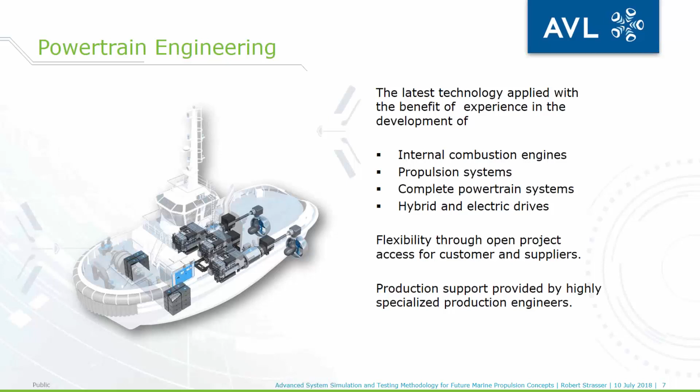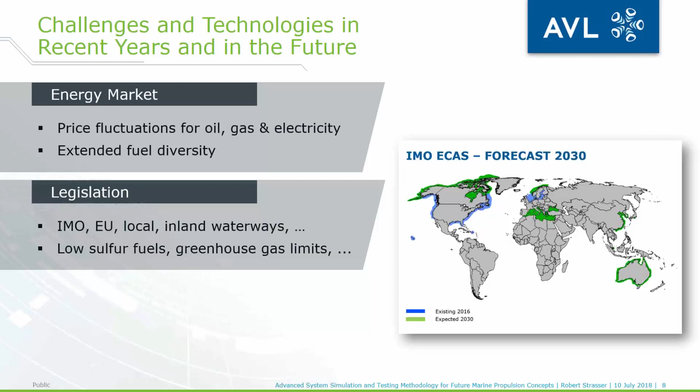We all had to face challenges in the last few years, and we will have to master even greater challenges in the future. The energy market is a challenge as the prices for oil, gas and electricity are changing, and they influence our work significantly. Catchwords are dual fuel engines, conversion to gas operation and hybridization. The legislation forms our boundary conditions for developing new products. Emission control areas will be extended. There are very strict local legislations, and low sulfur fuels and limitation of greenhouse gases are major topics. The environmental awareness of our customers and our environmental responsibility are also important drivers for introducing new technologies. There is high attention of public and politics.

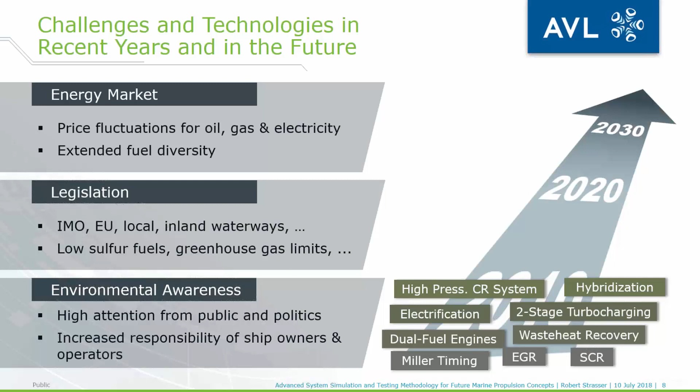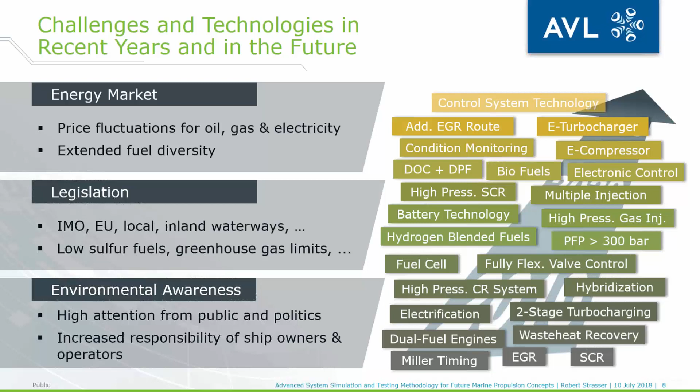In the last years, we successfully introduced technologies such as Miller timing, EGR, SCR, two-stage turbocharging to the market. Dual fuel engines and hybridization are almost state-of-the-art technologies today, even for the marine industry. AVL is now working on many new technologies: fuel cell technology, battery technology, electronic control, electrically driven turbochargers, new ignition technologies such as microwave or laser ignition, new after-treatment concepts, and many more.

Ambitious goals must be achieved by 2030. The carbon dioxide emissions have to be reduced by 40%. The NOx emissions should be 80% lower. Here we need completely new approaches. It is not enough just to optimize engine performance or optimize single subsystems. New concepts are required, comprising the entire propulsion and energy system of a vessel.

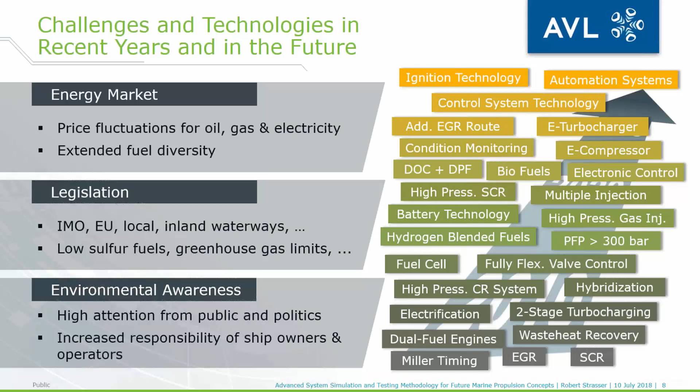AVL customers are no longer only engine OEMs and engine suppliers. In case of marine applications, we have shipyards, shipbuilders, ship owners and operators, propulsion system suppliers, control suppliers, but also classification societies as customers and partners. The partners developing a new product or operating an existing system have various challenges and tasks listed in this figure. Shipyards are responsible for system integration, and they want to improve the total cost of ownership for their customers.

Engine and component suppliers want to introduce highly efficient, reliable products, enabling lowest emissions and best energy efficiency design index. Ship owners want to do route optimization, maintenance planning, or they want to renew their fleets. Last but not least, classification societies are interested in concept proofs, virtual homologation, model-based validation of systems, or fail-safe investigations. Most of these different tasks can be supported by system simulation, virtual system integration, or model-based development approaches.

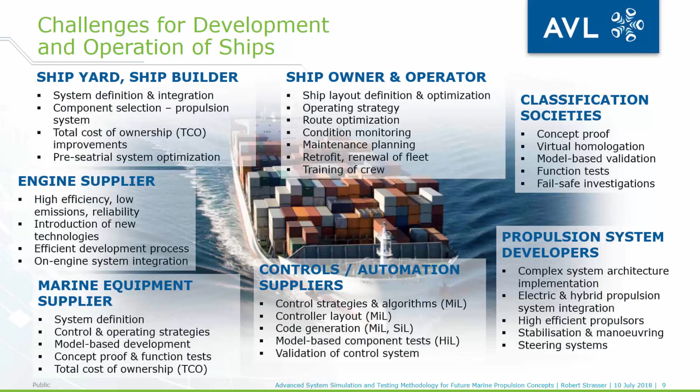We need technologies which ensure the compliance with future environmental legislation. There is the combustion engine technology, for example, two-stage turbocharging, the increase of the peak cylinder pressure higher than 300 bar, variable compression ratio, variable valve timing, LNG, gas engines, exhaust gas after-treatment technologies, or friction reduction.

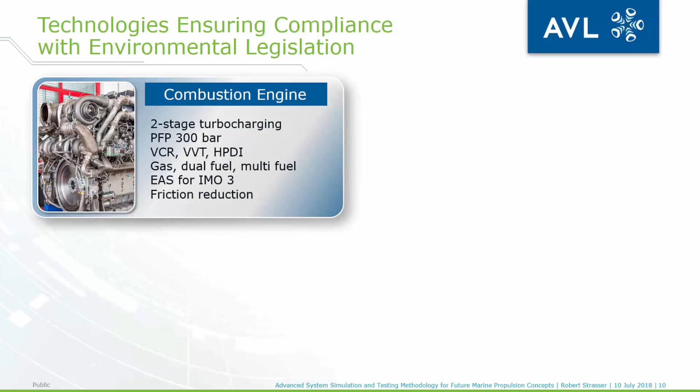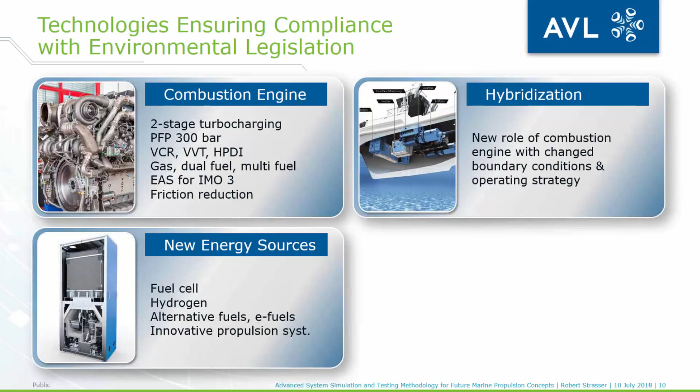Hybridization is interesting in many areas of marine application. Here the combustion engine has a new role with changed boundary conditions and operating strategies. New energy sources, fuel cells, hydrogen and alternative fuels, energy storage systems and innovative propulsion systems can also contribute to an efficient and clean operation.

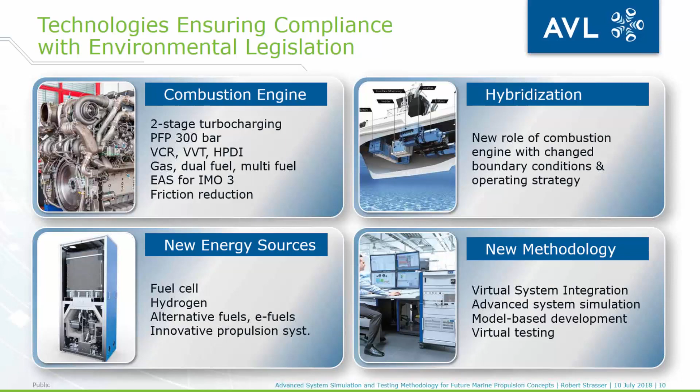And there are new methodologies such as virtual system integration, advanced system simulation, model-based development and virtual testing. They support the development and help to optimize the overall propulsion and energy systems of ships. Virtual reality plays an increasingly important role in the development process. There are catchwords such as virtual system integration, system simulation, and model-based development.

Today I would like to show you that these terms are not abstract terms and that system simulation and model-based development approaches are helpful tools for developing new marine propulsion system technologies, and how simulation and model-based development activities can support testing. So I will give you a brief introduction to system simulation and its tasks. Then I will show use cases, and subsequently I would like to explain model-based development and virtual testing.

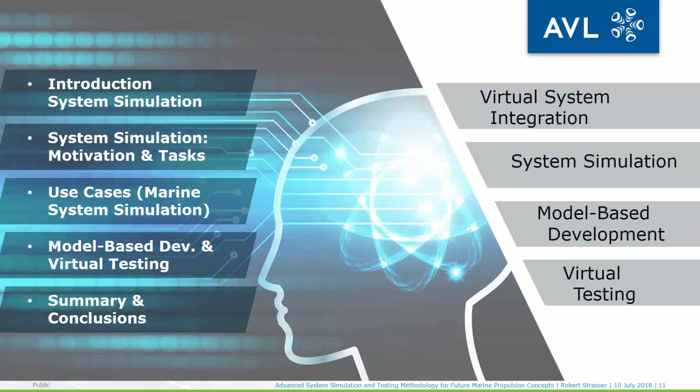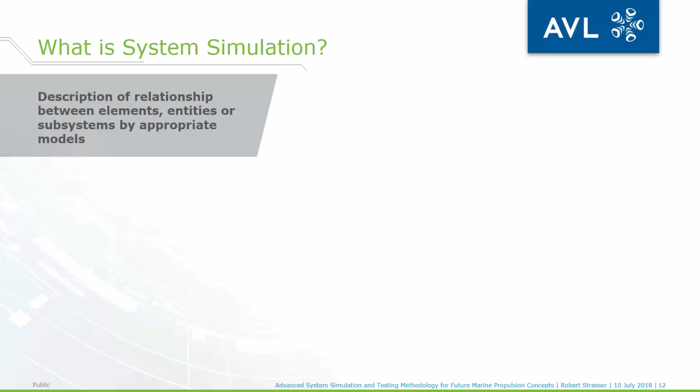First of all, I would like to explain system simulation. According to my definition, it is the description of the relationship between elements or components by appropriate models. I would like to explain it by means of a small example from biology. If we have a predator-prey relationship, for example with foxes and rabbits, this relationship can be described by the so-called Lotka-Volterra equations. Two ordinary differential equations are coupled.

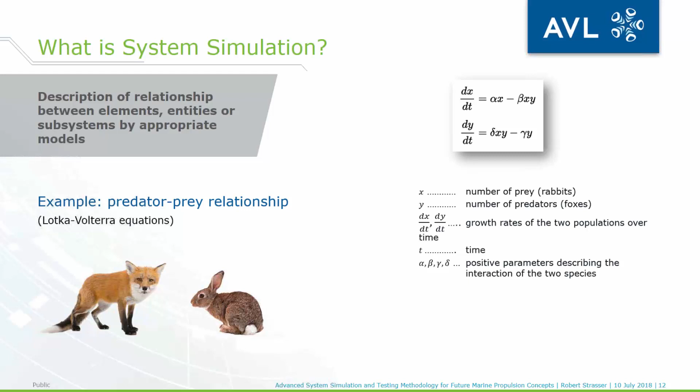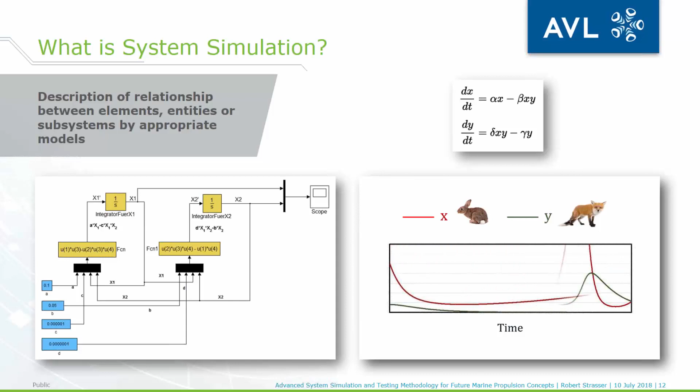The numbers of foxes and rabbits are variables, and the growth rates of each population and some parameters are describing the interactions of the species. We can set up a simulation model describing the situation and simulate it. And based on the chosen parameters, we can achieve thousands of different results for the development of the fox and rabbit population. Only a few cases are shown in this figure. But there's a huge variety of different results depending on the boundary conditions and the parameters.

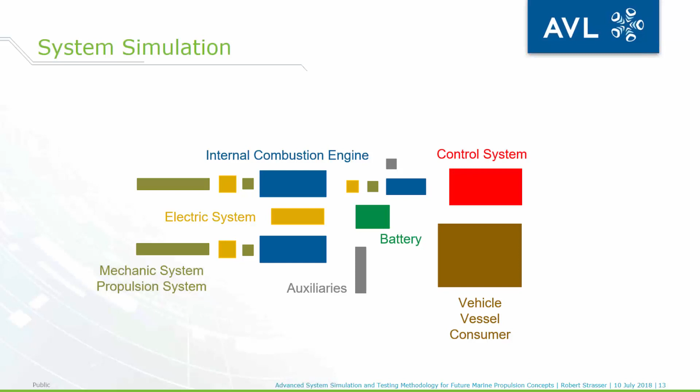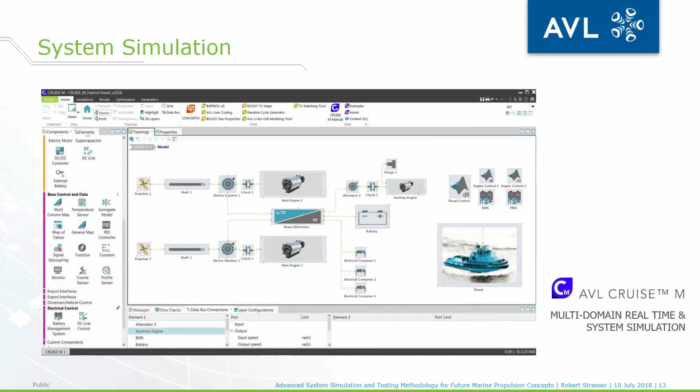Whereas in the example with the foxes and the rabbits there are only two subsystems, for the system simulation of a marine hybrid application, many single models, subsystems and components of different domains with different characteristics can be used for the purpose of an overall system simulation. With an appropriate tool, it is possible to describe components and to describe the interactions between components and subsystems. The multi-domain system simulation allows the optimization of the energy management and investigations on the interactions between various subsystems.

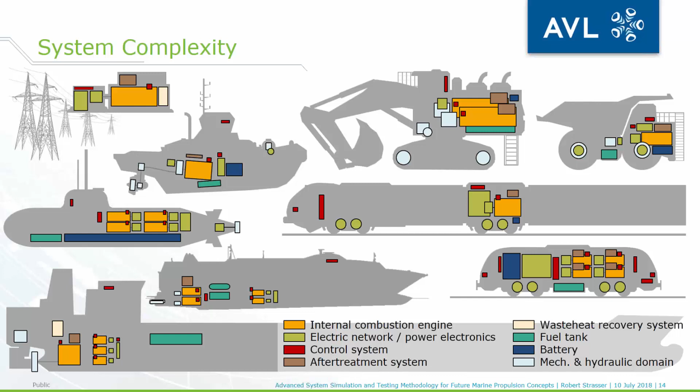Large engine applications are generally characterized by high system complexity, as there are multiple propulsion and energy systems comprising different domains. Especially in view of increasing demand regarding new technologies and hybridization, system simulation and model-based development approaches help to understand and to optimize overall systems. There are numerous tasks of system simulation in the development process with the aim of supporting concept decisions and the specification of components, but it is not enough just to find the best and optimum components. It is necessary to develop the optimum operating and control strategy.

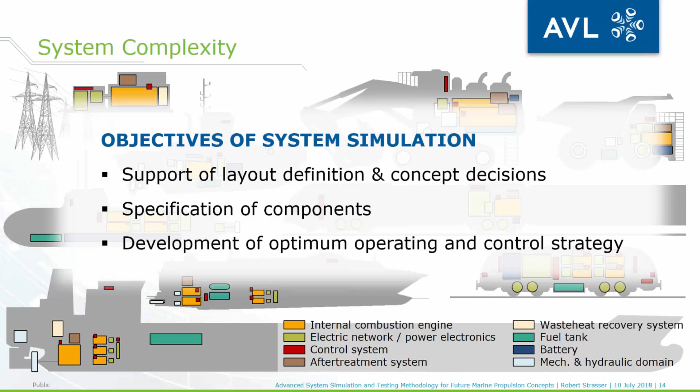The main objective of system simulation is the improvement of the operational excellence. It should support new ship design, optimize performance and the operating strategy. It should help to prevent errors and detect failures in a very early stage. Damages should be avoided and the reliability and availability have to be improved.

System simulation and virtual testing is useful when tests are too expensive to be performed, when there is limited component availability, and when the effort for testing and the number of variants are high. System simulation and virtual testing is also useful when the risk of tests is high. With virtual approaches, there is no danger of exceeding limits and damaging very expensive and individual components. System simulation is a valuable methodology when tests cannot be performed in reality, for example, if extreme boundary conditions are given or when worst-case scenarios should be investigated.

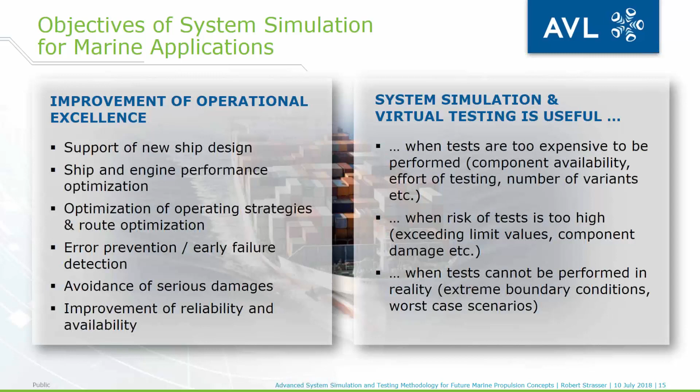What are the benefits? There are three main benefits. The cost reduction: virtual tests are much cheaper than hardware tests. Early detected failures reduce cost and the operational expenditure can be reduced by optimization. A clear reduction of development time: due to a shift of development activities, for example controls development or calibration, from the testbed to HiL systems or to the office in an early project stage, the overall development time is shorter. A very important aspect is the quality improvement.

As tests can be performed virtually which cannot be performed on the testbed or in real life, virtual testing is a clear measure of quality assurance. Fail-safe investigations can be easily performed and systems can be virtually validated. That means that costs can be saved before they even arise.

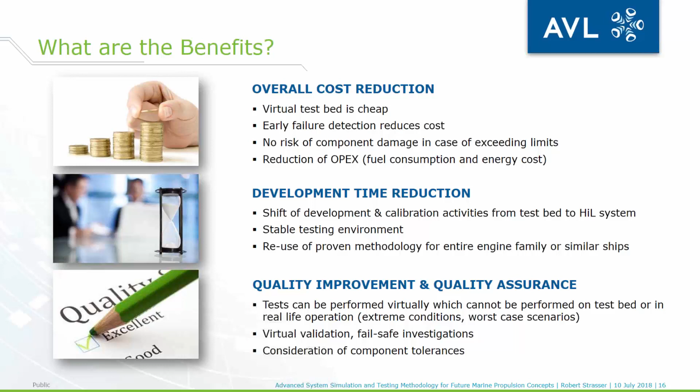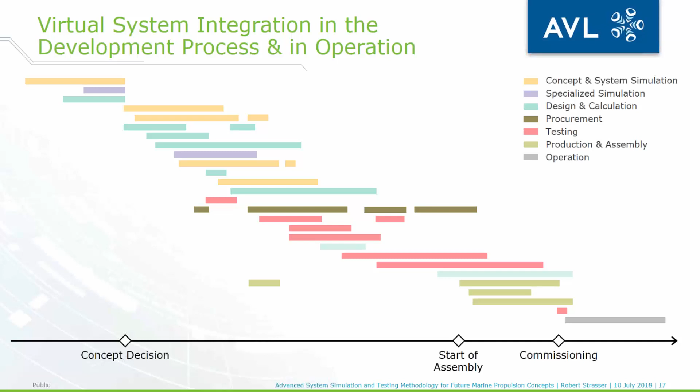Let's have a look at the AVL development process of any large engine application. You can see a schematic with three main events: the concept decision, the start of the prototype assembly, and the commissioning. The virtual system integration is embedded into the entire development process and even in the real operation after commissioning.

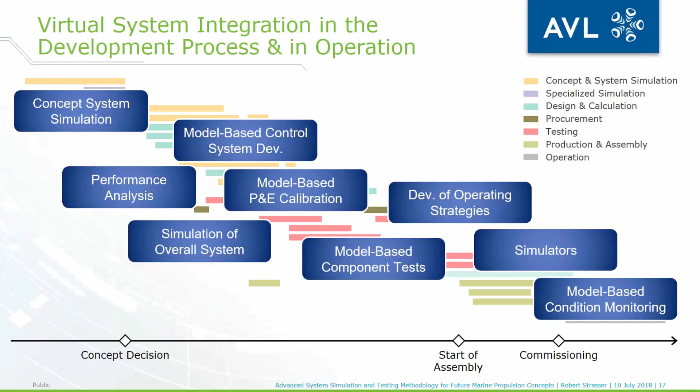It starts with concept simulation and performance analysis, makes use of various model-based approaches such as model-based control system development and model-based calibration, and continues during operation, for example with simulators or model-based condition monitoring. The idea is that one model should answer all the questions of all the development partners, suppliers, shipyards, classes, and operators.

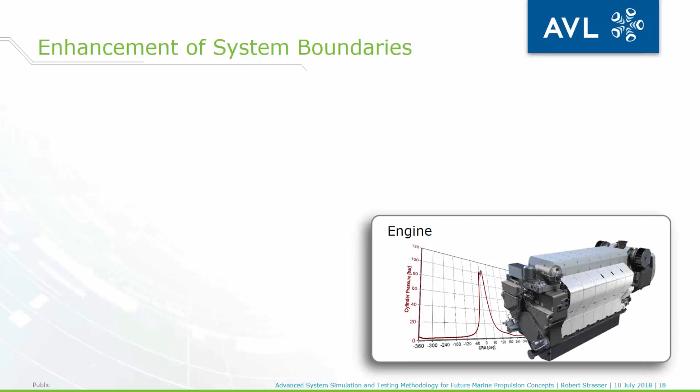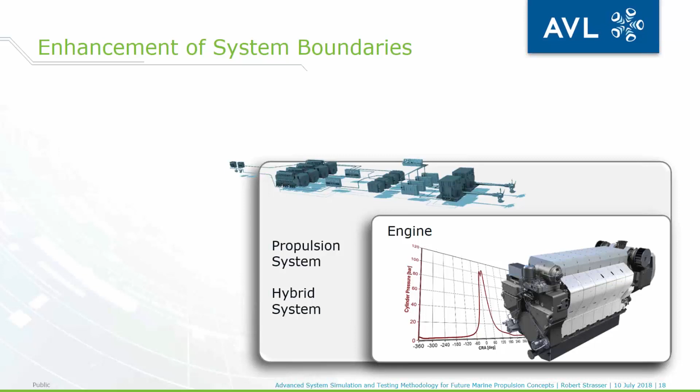An interesting aspect is the enhancement of system boundaries. Usually we have the focus on the engine or single components of the propulsion system. However, the engine is embedded into a propulsion system, maybe a hybrid installation, influencing the operation and the performance of the engines. And the propulsion system is embedded into an overall system, for example a ship with additional power consumers, operating strategies, and control systems.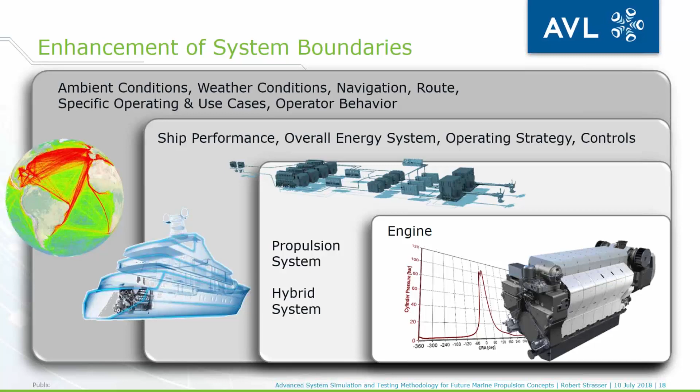Last but not least, there are ambient and weather conditions, navigation, routes, specific operating and use cases which have effects on the performance of the propulsion system and the boundary conditions of single components. The appropriate system boundaries have to be chosen in order to consider all relevant effects for the given task.

We mainly use Cruise-M as a multi-domain system engineering simulator. The name of the tool, Cruise-M, might be misleading for marine applications, as the tool has its origin in the automotive world. However, it is not only possible to use it for the simulation of cruise liners, we can use it for all types of vessels and ships. Cruise-M is an open and integrative platform with a multi-physical approach, which allows a consistent plant modeling through the entire development process with scalable models.

Besides, we use AVL Model Connect. This is a neutral model integration and co-simulation platform connecting virtual and real components. With Model Connect, it is possible to connect simulation models created with different leading simulation tools to a consistent virtual prototype, and we have also full support for industry interface standards such as the so-called Functional Mockup Interface FMI or FMU.

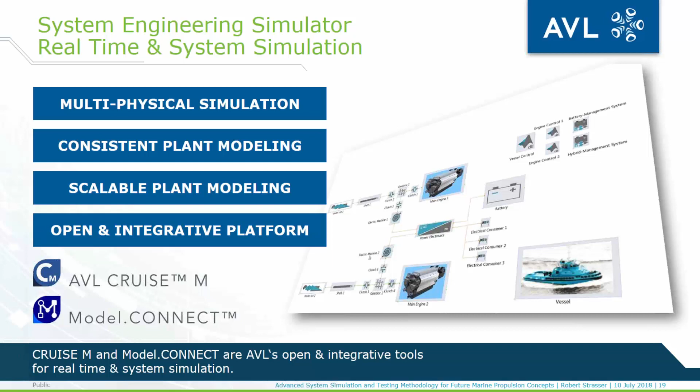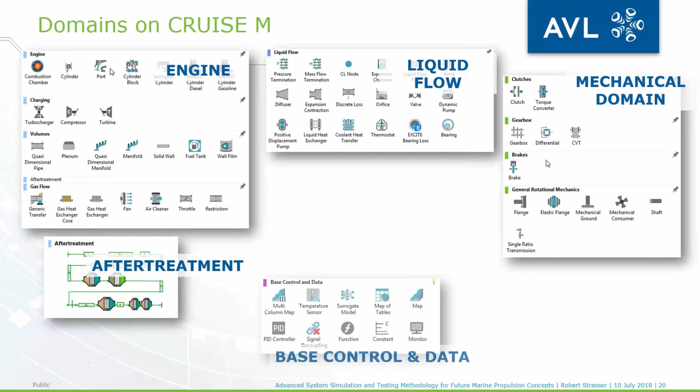Different domains can be described by means of predefined components with the system engineering simulator: the engine, after-treatment system, liquid flow for describing the cooling and lubrication circuits, mechanical domain, control functionalities, and the electric domain for hybrid models.

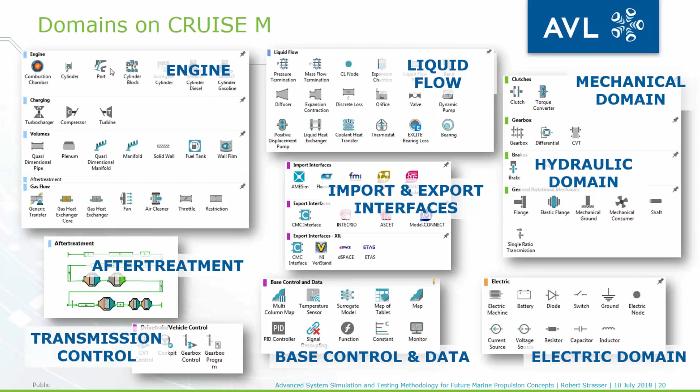Today I would like to have one focus on crank angle resolved real-time engine models. They are important components of system simulation because the combustion engine will remain a dominating element for the propulsion system for many marine applications for the next decades, in spite of the hybridization and electrification in certain areas.

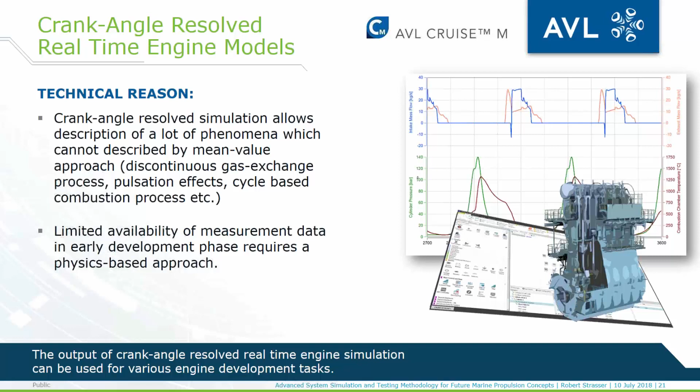The technical reason for using these models is that crank angle resolved simulation allows the description of phenomena which cannot be described by a mean value approach. For example, the discontinuous gas exchange processes, pulsation effects, or cycle-resolved combustion processes. Besides, as the availability of measurement data is limited, especially for large engines in concept and layout phase, physics-based real-time engine models are of special interest in view of system simulation and model-based development approaches.

This approach is more or less a thermodynamic cycle simulation in real time, as the gas exchange process and the high pressure cycle in the cylinders are simulated in crank angle resolution, and also the pressure and mass flow pulsations are considered. Several engine features and phenomena can be considered, such as cycle-to-cycle variations, EGR operation due to pressure pulsation, skip firing for gas engines, knocking, misfiring, variable valve timing, and dual fuel engines. We have a cylinder individual simulation, and we can use different types of injection, combustion, knock, and emission models.

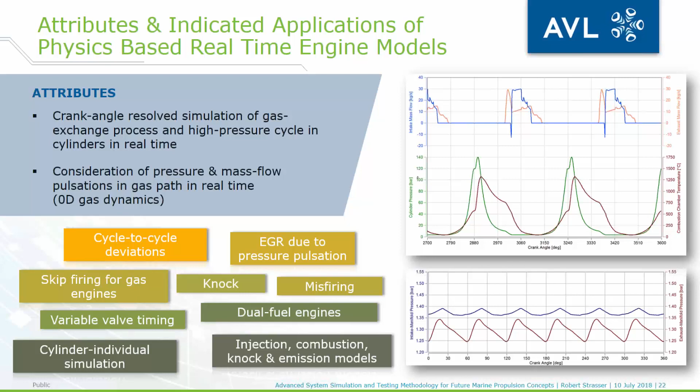Such innovative engine models can be used for the simulation of the overall ship propulsion system. A model of a ship can be created with Cruise-M. The modeling depth of the models can be chosen in accordance with the question which should be answered by the simulation. We can use a simple map approach of the engine, or like in this case, a detailed crank angle resolved real-time engine model of a large two-stroke engine.

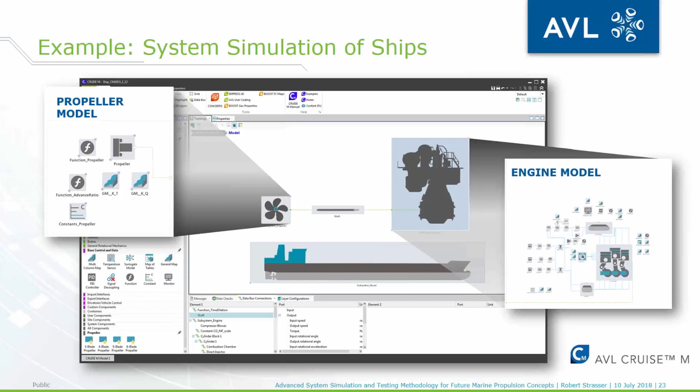The propeller can use the open water characteristic of a propeller under consideration of wake fraction and thrust deduction, or it can use a more simple approach. And also for the ship's resistance model, it is possible to use more physics-based or empirical approaches.

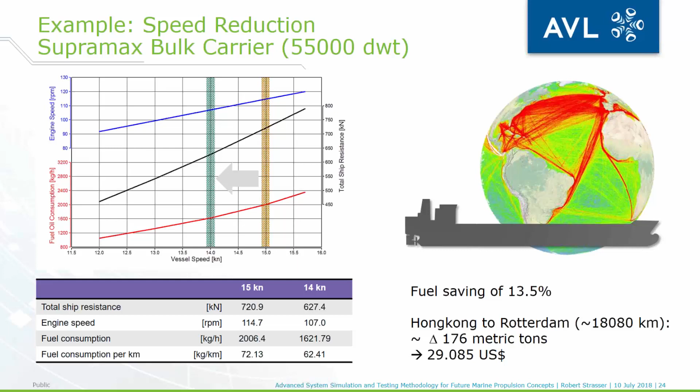With such a model, we have simulated a Supramax bulk carrier with 55,000 deadweight tonnage and an overall length of 190 meters. The question was, what is the fuel saving potential when reducing the vessel speed from 15 knots to 14 knots? It is approximately 14%. And in this simple example, we calculated also the fuel saving potential for a route from Hong Kong to Rotterdam, which is 176 tons.

Another investigation was processed with regard to fouling. Due to the growth of plants and animals on the hull and the propeller, the resistance increases significantly during the operation of a ship. Here we calculated the resistance increase within 1 year, and the corresponding increase in fuel consumption in 1 year is approximately 10%. Such investigations can be performed for optimizing the dry docking intervals and the maintenance intervals.

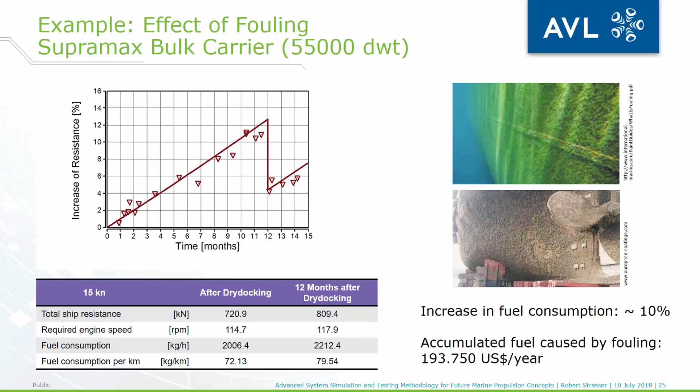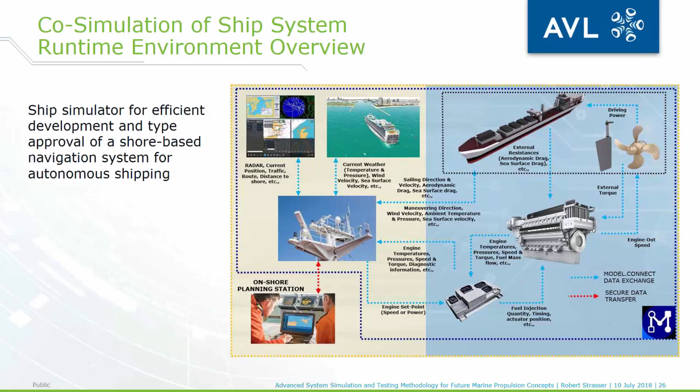The following example of a ship simulation was used to support the efficient development and validation of a shore-based navigation system for autonomous shipping. The model is a fully functional ship simulator to be connected to environment and traffic models, and it includes detailed engine simulation in real time. The considered ship is a roll-on, roll-off car carrier with an overall length of 140 meters. It has 2 independent propulsion lines with 6,500 kilowatt diesel engines and 2 controllable pitch propellers and a bow thruster.

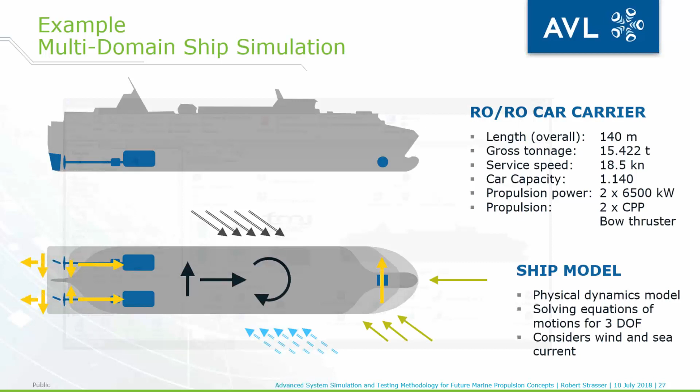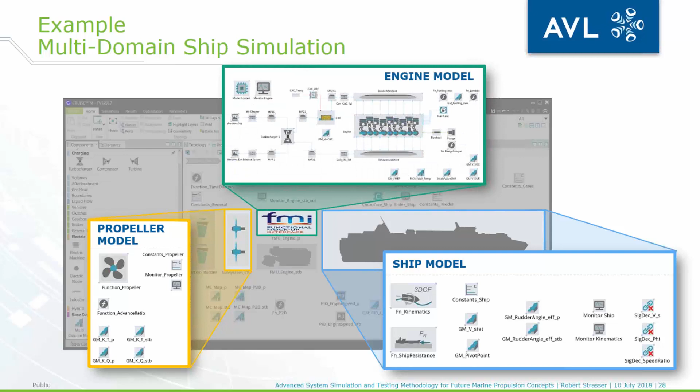The simulation model was set up with CRUISE M. The relevant components of the propulsion system were considered, and a fully functional maneuvering model was set up. In this case, we used a kinematic model for the ship, solving the equations of motion for 3 degrees of freedom, considering also the influence of wind and sea currents. The propeller model considers the open water characteristic. In this case, the full characteristic of controllable pitch propellers was considered. For the engines, we used detailed crank angle resolved engine models, providing also the cylinder pressure diagrams in real time.

Here you can see the speeding up of the vessel from standstill and idling of the engines. If the set point of the engine speed for the two engines is changed from idling to MCR speed, the mean effective pressure is getting higher and the engines and propeller speed increase. Based on the propeller and the ship speed, the pitch of the propellers is controlled. On the right curve monitor on the top, you can see the time-based cylinder pressure of cylinder 1. The peak cylinder pressure is getting higher and higher according to the injected fuel mass. With this ship simulator, all relevant ship maneuvers can be simulated, and so it was perfect for the development and validation of the navigation system.

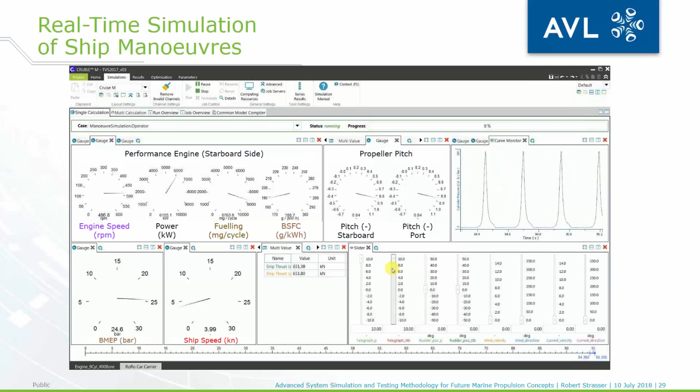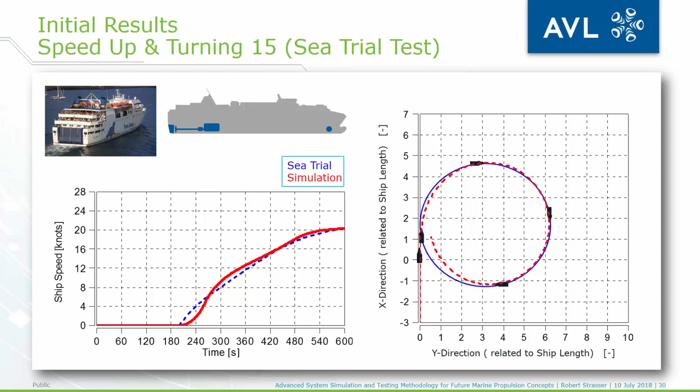As an example, the comparison of the simulation results with the measured data of the sea trial test is shown in this figure. The comparison indicates a good correlation for the speed up of the ship and also for the turning circle with a rudder angle of 15 degrees.

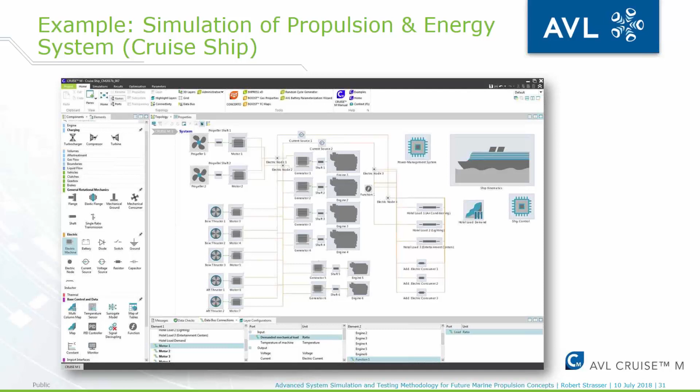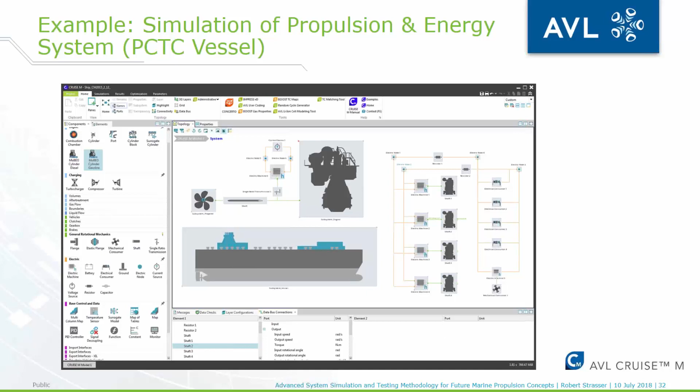The next topic I want to cover is hybridization and electrification. In Europe, there are some market movements in this direction, mainly with funded programs and projects. The motivation for hybridization and electrification is not only the environmental responsibility, the efficiency improvements, or emission legislation. There are also other reasons, such as component protection. As an example, the peak shaving of dredging ships with sudden load steps to protect the engine can be mentioned. Additional electric motors and energy storage systems can improve the transient behavior of ships and help the maneuvering and dynamic positioning. It is also a safety topic, as redundant propulsion systems are possible.

Besides, the low acoustic and thermal signature with military applications and the silence and comfort with luxury yachts are of interest. Today, almost all hybridization projects are funded by governments. Maybe this is also a good motivation for introducing electrified propulsion systems and energy storage systems for marine applications.

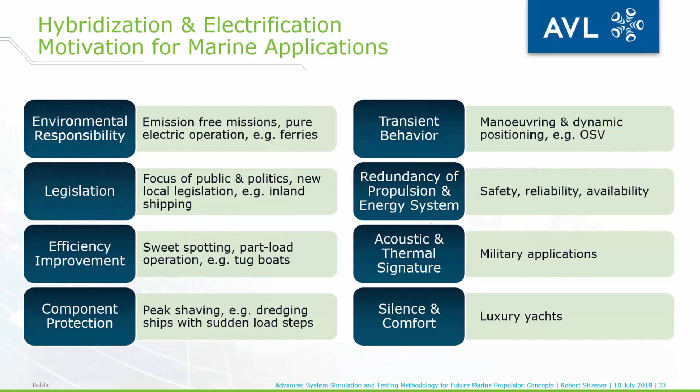The systems are becoming more and more complex. The number of system components and parameters is increasing. The demand for the optimization of operating and control strategies is high. Therefore, system simulation can be seen as a valuable tool for concept decision and system optimization.

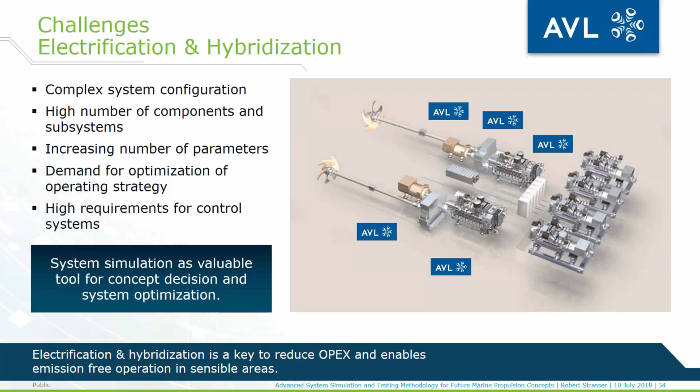In the virtual world, models are indispensable components to investigate and optimize the complex interactions between subsystems. For hybrid applications, we need models for energy storage systems such as batteries or fuel cells. Generally, AVL has many different battery engineering services: design engineering, system validation, testing and benchmarking, future technologies, and many other.

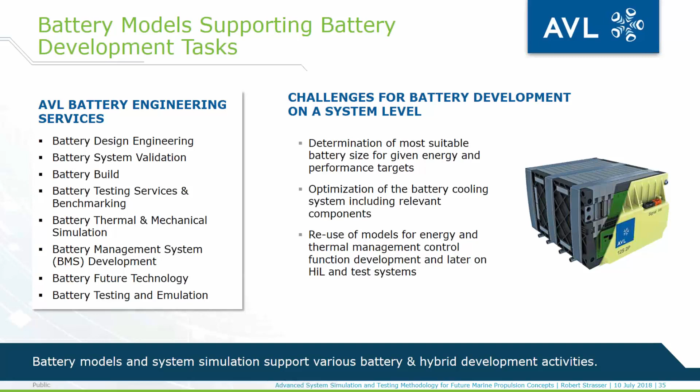There are challenges for battery development on system level with the questions: can I determine the most suitable battery size for given energy and performance targets? Can I optimize the battery cooling system including relevant components? Or is it possible to reuse my models for energy and thermal management control, function development, and later on HIL and test systems? So, battery models and system simulation support various battery and hybrid development activities.

There are, of course, different types of models on component level, but for the system simulation, we need models on system level. The model should describe the electric and thermal behavior of cells and batteries, voltage response to current, time and temperature, heat losses, temperature and cell resistance, but also aging effects.

In our simulation tools, we use empirical electrothermal battery cell models, but also a semi-empirical model based on equivalent circuits. For the description of aging effects, there is also an empirically based model with a self-training algorithm. The state of health is a function of temperature, state of charge, current, time and history.

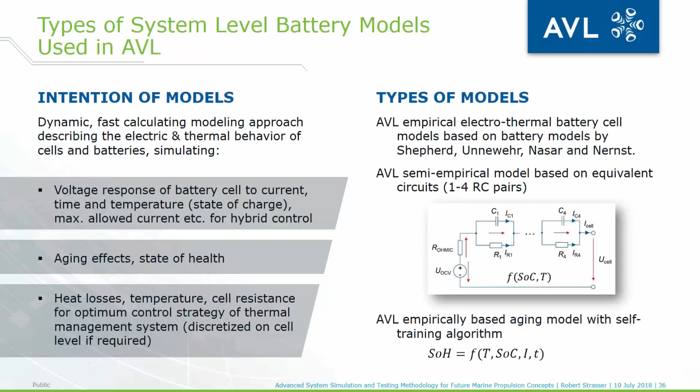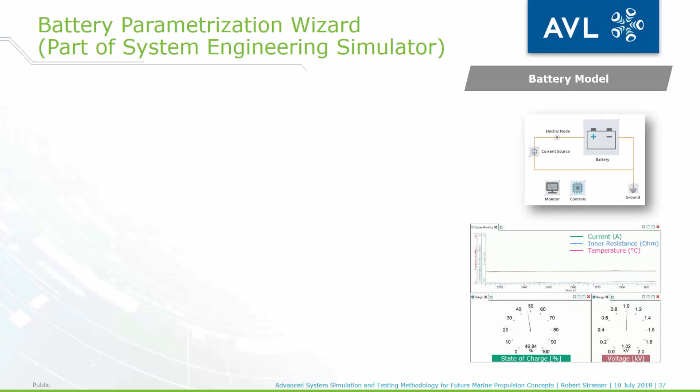To make sure that the battery model actually describes the operating behavior of the battery, various parameters have to be set. Some of our customers had problems with the parameterization of the battery models, and that was the reason that AVL developed the so-called battery parameterization wizard.

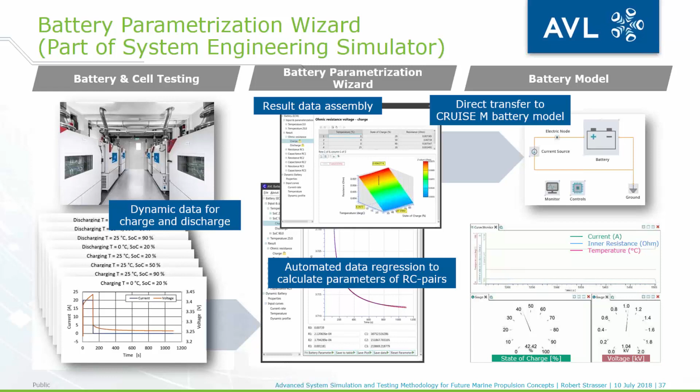The results of our battery and cell testing, in particular dynamic data for charge and discharge at different conditions, are the input for this tool. The tool itself automatically executes the data regression to calculate the parameters of the RC pairs and the result data assembly. The results can subsequently directly be transferred to the battery model.

The following example shows the application of real-time engine and battery models in a simulation of a hybrid tugboat. It can be used to support concept decisions, furthermore to specify the components of the propulsion and energy system, and another important task of the system simulation is the optimization of the operating strategy for a given operating profile. In this case, we have an operating profile with very high percentage of operating time with lowest required propulsion power, which is a good use case for hybridization.

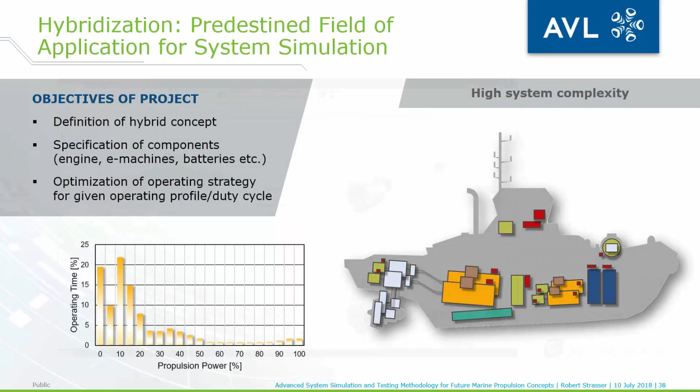The ship model was created with CRUISE M. The modeling depth of the sub-models can be chosen in accordance to the questions which should be answered by this simulation, and in this case, we used battery models describing the electrothermal behavior by means of a semi-empirical approach. For the engines, we applied a detailed crank angle resolved engine model, providing also the calculated cylinder pressure diagrams in real time. The torque for the propellers can be provided either from the electric machines or from the main engines.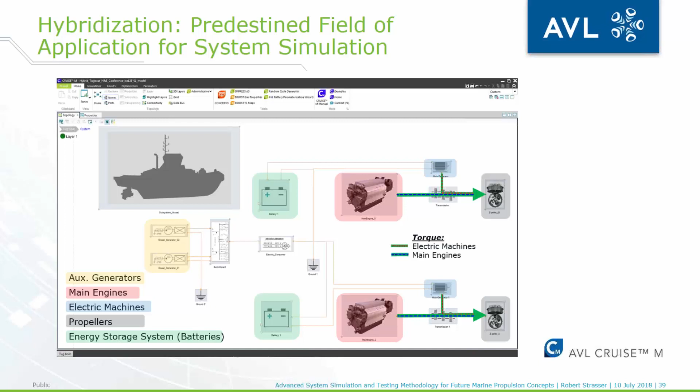I would like to remark that for investigations of steady-state performance, we would not mandatorily need such a system simulation. However, for describing the transient operation and for the optimization of operating profiles, the use of such a system engineering simulator is quite helpful. The movie of the simulation shows a part of the speeding up of the boat, starting with pure electric propulsion, and the main engines are already in idling. After a while, the main engines are contributing to the overall power output, and the fraction of power from the diesel engines is increasing with the higher load demand.

In the graphs, the propeller speed, the ship velocity, and the state of charge of the batteries are depicted. As a thermodynamic cycle simulation of the main engines is performed in real time, also the in-cylinder conditions are known at each time step, and you can see the increase of the peak cylinder pressure in the top right curve monitor. So this information is very useful for the control system development of the engine control system, for example.

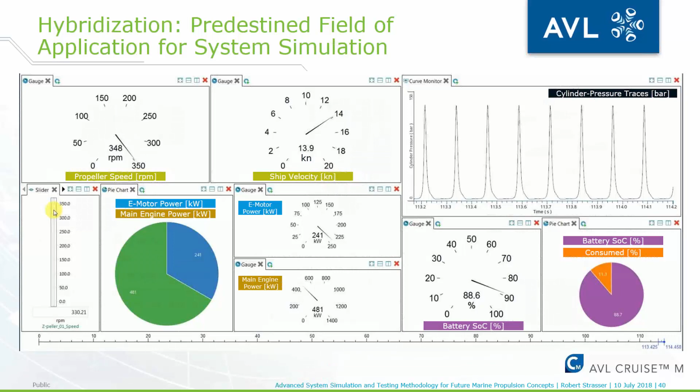Fuel cells are becoming more and more important as power units, also for marine applications. Due to the silent operation without vibrations, fuel cells are interesting for power generation in military applications, but also in luxury yachts. AVL has developed different products in the past, such as solid oxide and proton exchange membrane fuel cells, with different properties and for different power ranges.

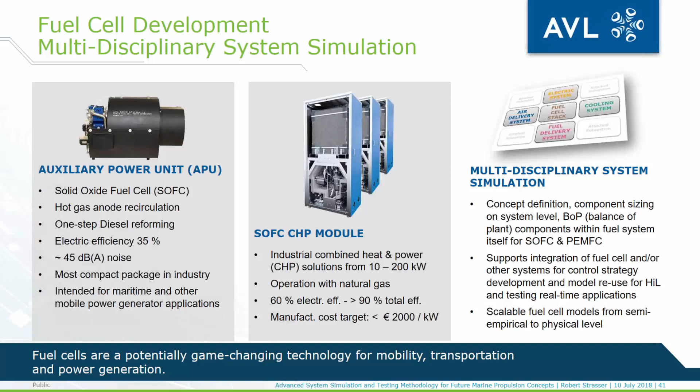The common thing is that these fuel cells are multi-domain systems, and therefore the multi-domain system simulation can support important development tasks. A fuel cell consists not only of the stack as the core component, but there is also the air delivery system, the fuel delivery system, the cooling with the air system, and of course the electric system enabling the energy storage. And there are various interactions between these subsystems. The objectives of the simulations are concept definition of the fuel cell, the optimization of system parameters, and the support of the integration of the fuel cells into particular applications such as yachts.

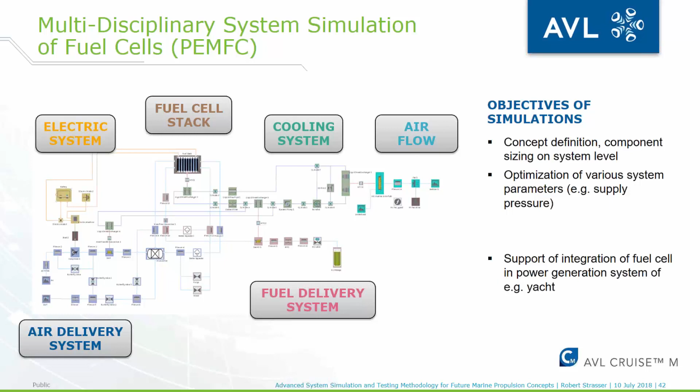As a simulation example with this model, the variation of the air pressure in the system is shown. The graphs represent the time-based results of the possible hydrogen consumption and the electric power output when changing the air pressure.

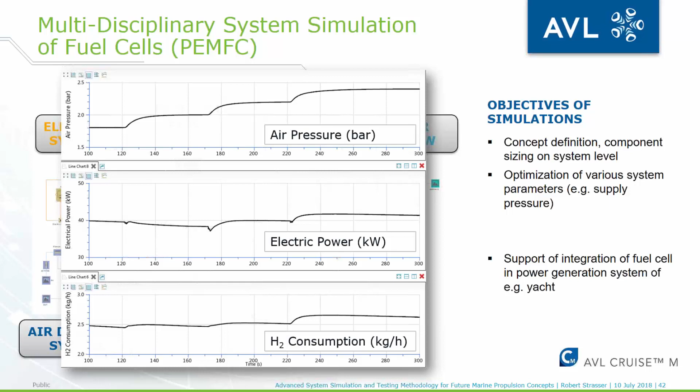Finally, I want to show you our virtual testing activities for marine applications. There's a clear added value. We can reuse the models already used for system simulation also in our model-based development approaches. Such model-based development is characterized by the replacement of hardware components by real-time capable simulation models running on hardware in the loop systems.

Especially for large engine applications and their particular boundary conditions, model-based development approaches and virtual testing are of high interest as they offer several benefits. For example, testbed operation for large engines is a big effort. It can be very expensive, and also the fuel costs are in the range of thousands of euro per hour. Testing, of course, cannot be fully replaced, but the virtual approaches should support testing in the best way.

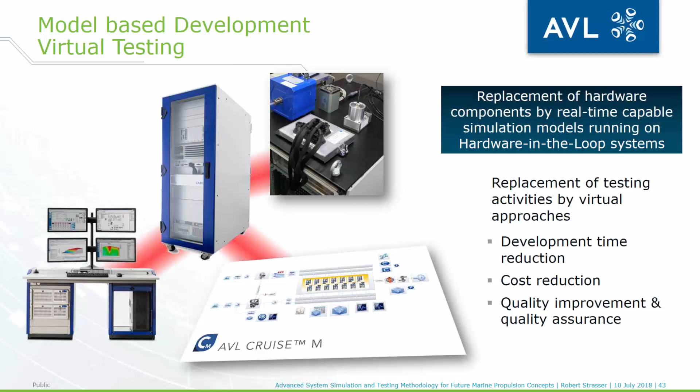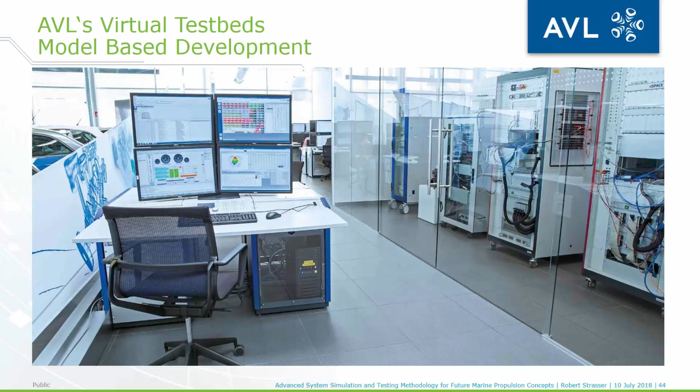Here you can see AVL's virtual test field. The operating panel is completely the same as on the real testbed. We have the testbed operating system, the automation system, and the optimizing system running, and the operator needs not to know whether he operates the real engine or a model. The tests can be automatically performed during night without manpower.

Numerous tasks can be performed with such virtual testbeds and hardware in the loop systems. One main field is control system development, the development of functions, algorithms, and the controls, including monitoring and OBD. Another very important field is model-based calibration and model-based exhaust gas after-treatment development.

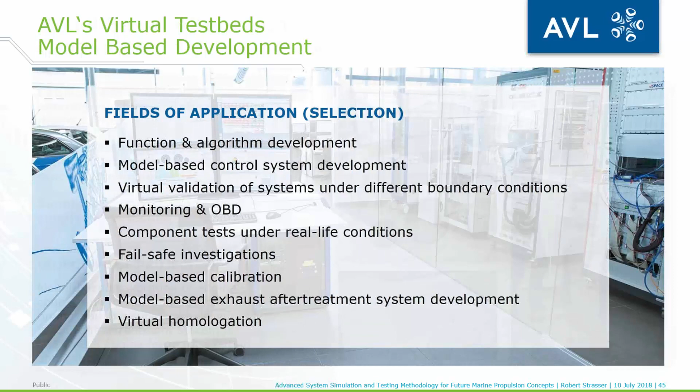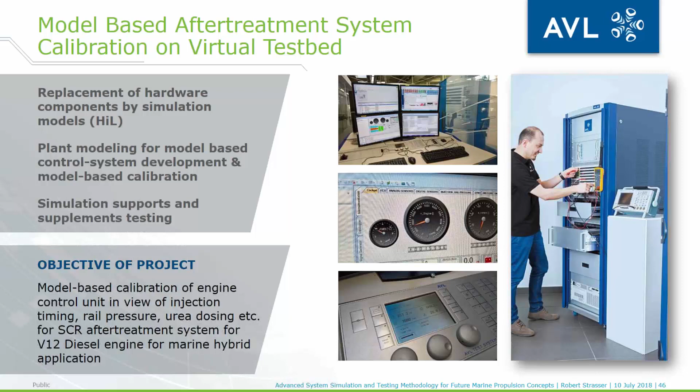As a last example for this webinar, I would like to show an example from model-based exhaust gas after-treatment system calibration on a virtual testbed. The objective of the project was the calibration of the engine control unit in view of mainly the fuel injection parameters and the urea dosing quantity for a V12 diesel engine with a SCR system for marine application. For this task, we used again a crank angle resolved real-time engine model.

The innovative aspect in this project was the combination of several features, such as a hydraulic rail model for the common rail fuel system, a phenomenological combustion model, simulating the combustion process and NOx formation, and besides a multiple SCR after-treatment system model. With this combination, the engine performance and the NOx formation could be simulated based on the signals coming from the hardware engine control unit.

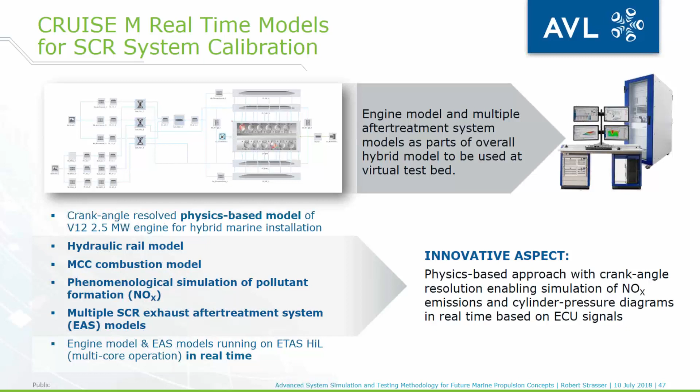In total, the new calibration of this system leads to a cost reduction of up to 3.3% for full load and approximately 1% in the considered operating cycle compared to the baseline calibration status for the engine without an SCR system.

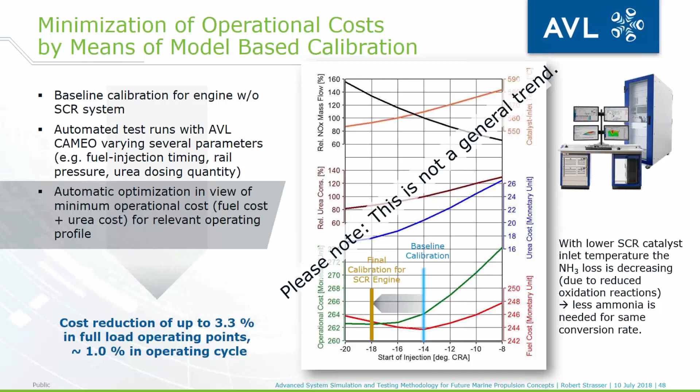As a conclusion of this webinar, I would like to say that system simulation and virtual testing help to understand complex marine applications and help to optimize performance and operating strategy in view of low operational expenditure. There's a big potential in reducing cost and development time. Besides, the methodology is a clear measure of quality assurance.

With the implementation of real-time engine models with crank angle resolution, the performance of engines within the overall system can be described in a very detailed way. That means that combustion engines can be optimized for hybrid operation in order to increase the overall system efficiency. AVL expects in the future an increase in system simulation and virtual testing, even in a way of permanent vessel optimization by means of models during ship operation.